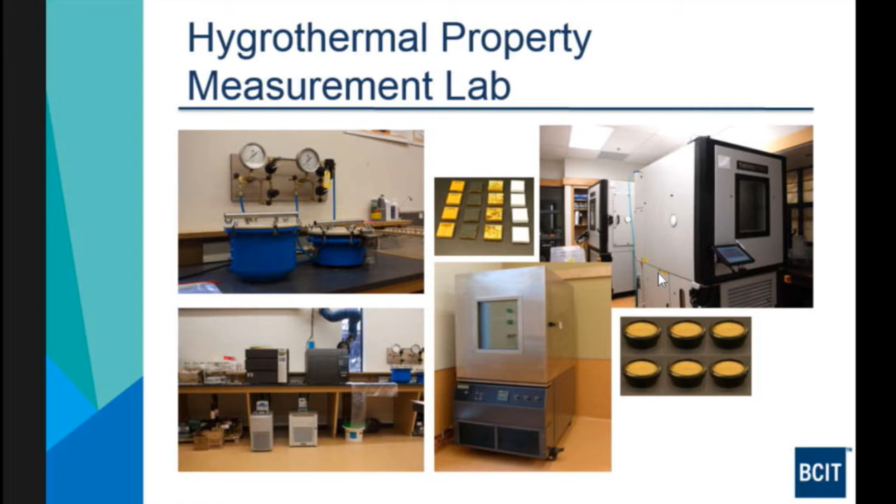Designed as a multi-purpose testing and training center, this facility has the research capacity to, for example, advance knowledge in quantifying wind-driven rain, evaluate and develop effective rain control strategies, evaluate the long-term hygrothermal performance of innovative envelope systems and building materials, and investigate the impacts of building envelopes on the indoor environment.

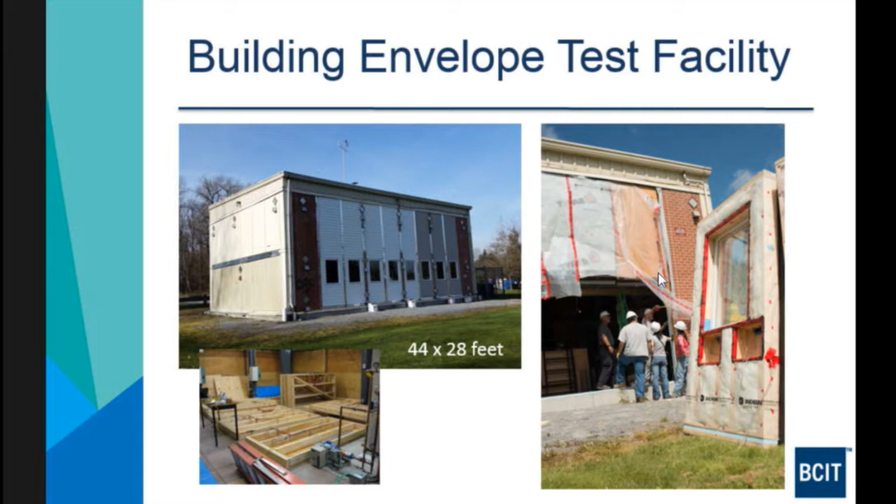This lab can evaluate various building design options in a holistic way, with the objective of choosing design parameters that lead to a reduction in energy consumption while maintaining indoor humidity at an acceptable level for occupants' comfort and health, and the durability of the building envelope components.

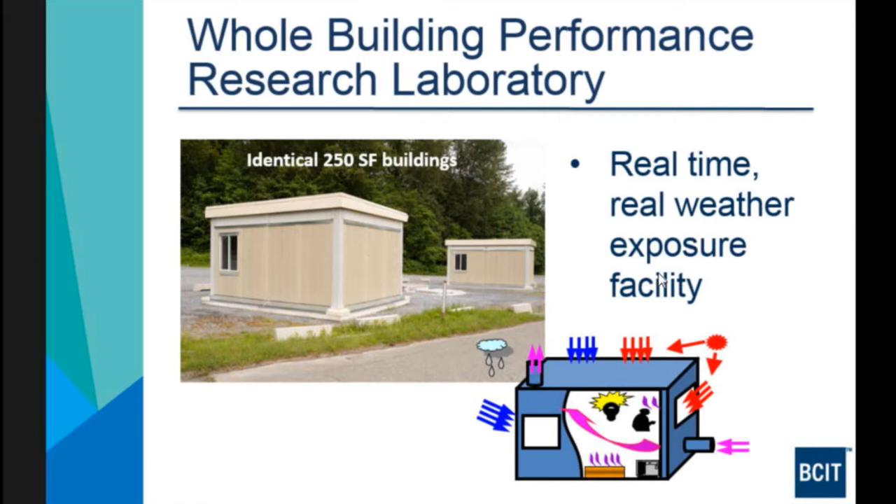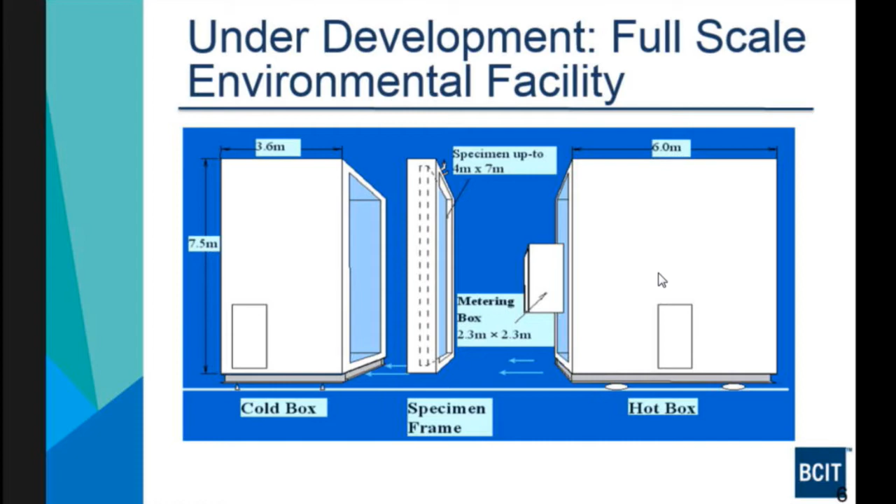Thanks, Bo. Good afternoon. The Center for Architectural Ecology was actually founded in 2002, and it serves the whole of BCIT quite broadly. The School of Construction and the Environment probably gets the best share of it, and within that, my attention to the graduate students within the building science program gets the best share of me. So I'll just go through a few slides.

This building is actually about 200 meters or so away from Alan's office and Fitzsim's office, but it is not in the large building where you typically go to meet with the faculty, just a little way to the east.

One is in the same area, the building envelope transmission loss setup, and I will speak to that a little later when we talk about research, a pretty exciting project coming out of there. And then we have a one-to-ten scaled anechoic chamber.

That anechoic chamber is like being in the middle of outer space, so no sound is reflected back. Boeing, for instance, has one so big they can put their super jets in it, and that's how we can understand the radiating intensity of sound. We do everything at one-tenth scale, just like an architectural model, and we bring the sound waves down as well.

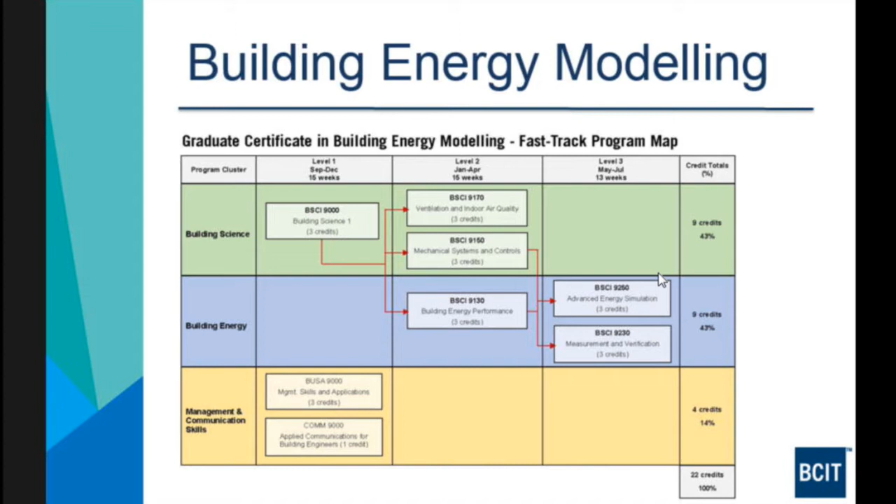I think I'm going to move on to the research. So I'll start talking about my research.

These are my interests: indoor environmental science, indoor environmental systems, and systems integration. These are the main areas.

So what is environmental science? It's what's going on in the spaces, about the physics, the air movement. It's not just physics, it's the central part, but it also has a psychology part—some people feel warmer than others, some feel colder, and there's psychology involved in that. Physiology too. So we collaborate—this is multidisciplinary, with people from different disciplines.

For example, thermal comfort, indoor air quality—that's building science, environmental science about air quality, where we need to understand contaminant emissions and transport in buildings, how contaminants move to maintain buildings healthy, where they are produced, from what activities.

That's indoor environment and systems, because we need to know how to deliver this indoor environmental quality. So when we talk about systems, I'm not just talking about mechanical, but the envelope, all the different systems. That's why I try to see this more as an integrated view.

Of indoor environmental quality. So here are some samples of what I'm working on right now with students: human and environment centered building engineering.

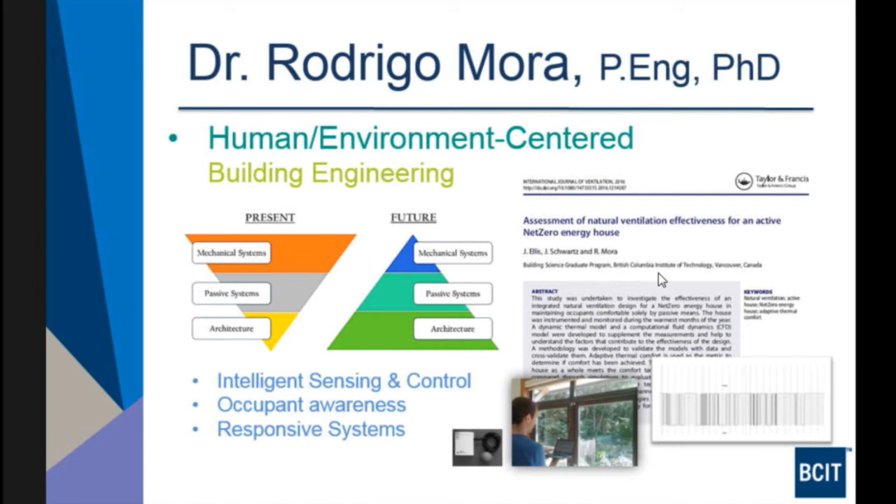Another project I'm involved in is building data analytics. That's a very interesting area, because you learn from the building. The building automation systems provide lots of data that can be supplemented—we can put our own sensors, and we are putting sensors in buildings, but we already have a lot of data coming from buildings, so we can use it.

Why is the overheating happening? We develop some analytics rules, basically, to find that. So that's an interesting project we're involved in.

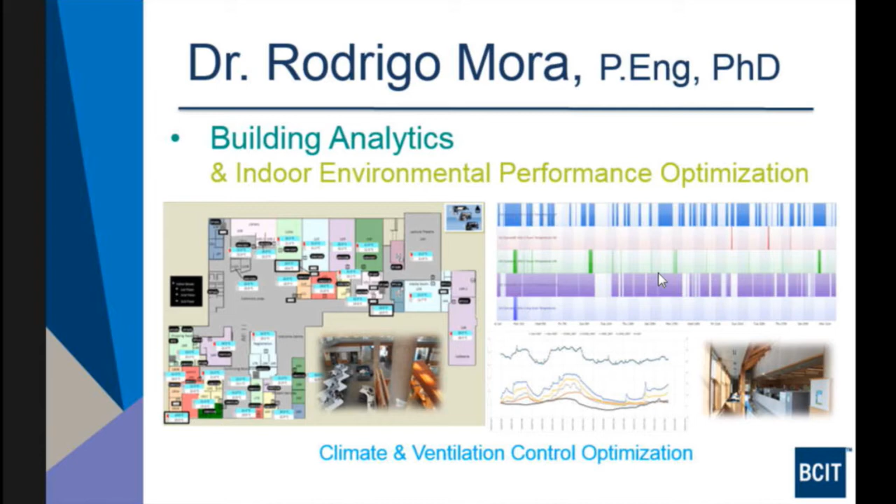The other one is paralleling housing, healthy housing—you can make the analogy to commercial buildings where we have remote sensing. We have a couple of houses, and we're trying to instrument more and more houses here in Vancouver. This is a very green home in Vancouver, developed by the newest code, with triple glazing and so on.

We instrumented the house—you see the data logger there—with some students, and we're monitoring the house. We can see the data from the cloud, and we're going to use analytics again to study the performance. We're also giving questionnaires, because this is about psychology too, to see how people operate and how they feel in the house.

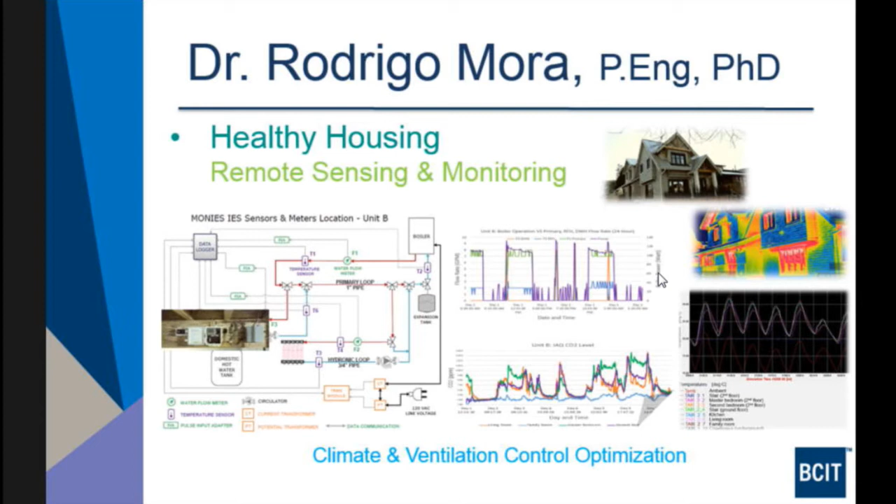My research interests, one is in innovative materials. Right now, as we know, the code has been changing every time.

There is a big push in having high efficient buildings. To achieve that, one of the things we have to do is on the envelope, meaning to have high performance envelope systems. To do that, one of the materials we need is insulation material, and with current materials we may not be able to achieve what we wanted. So one of my research areas is materials like aerogel insulation material, vacuum insulated panel, natural-based fiber reinforced insulation material, and also combination of different insulation materials to achieve high performance envelope systems.

The next one is building envelope design. First, I'll be looking at the material level using the facilities Bo was talking about earlier, looking at each material's property, both from the thermal and hygrothermal property perspective. Then moving to the building envelope, now knowing each material property, we can put it together and see how it performs as an assembly or as a whole system in the building.

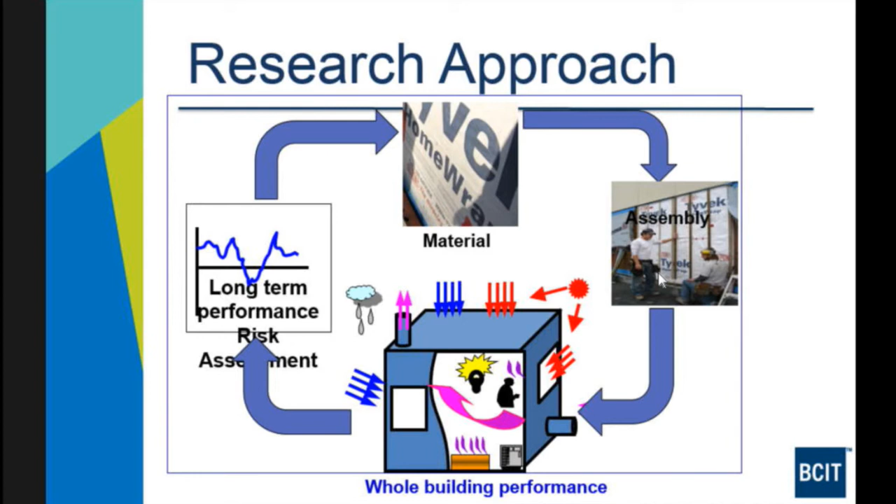I do lab and field experimental studies as well as computer models, using existing computer models and developing new ones. The inputs are material properties, which can be characterized from the facilities that Bo showed, and we have a weather station for climate data, which serves as input to the model. Then from the lab and field experimental study, the models will be validated.

And then the validated model is used for design of experiments. Once this cycle is completed, the model will be used to predict how it performs in other kinds of scenarios. So this is an integrated approach that I'm undertaking at this time, and a number of students are working in different areas of this map.

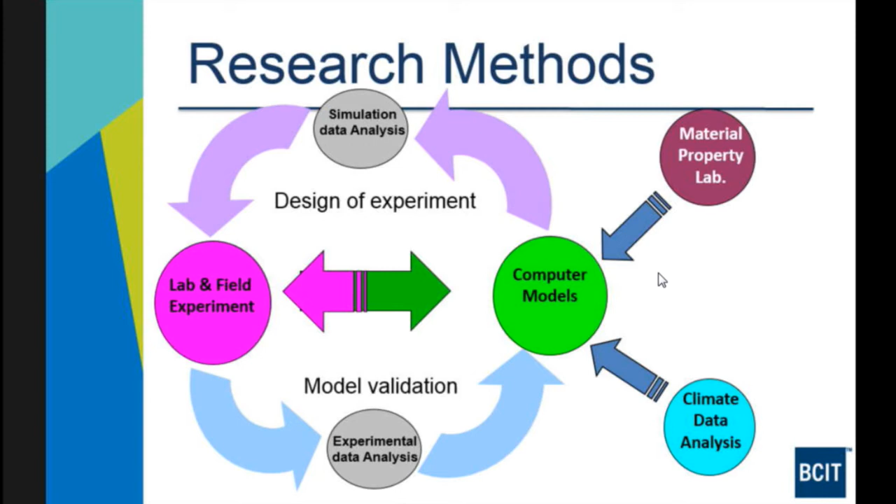Well, I like that last slide because I could adopt that one, and I think we all could. So I have a different approach of how I was going to explain my research work. I thought I would go over some of my students' projects, those that have graduated or those that are working, because as each one of us, we have fairly large fields of endeavors, so you might be sitting there wondering what piece might I get to do. So that's how I'm going to approach it. But I can summarize it.

First, it's in architectural acoustics. And when we talk about architectural acoustics, we're talking about the larger community, so outdoor sound propagation. One of the things that's very much happening here is an increase in densification of this city. And as you increase densification, you increase your ambient noise level, and we have to deal with it now. It's just starting to happen here on the West Coast. There are people in England, in some developing countries, that are well ahead of us in terms of densification and noise source.

The need for that research is tied to the issue of health, where noise can create stress, cardiovascular disease, cognitive delay, and a number of other health issues. Those would be epidemiologists that I collaborate with who work on that.

So architectural acoustics is what's happening in the exterior environment. The next part is we follow the path of where that noise goes, and for us in the building science area, it's going through the building envelope. There's a fair amount of research around sound transmission through the building envelope—we'll cover that in a bit—and then what happens inside the building. That ties into the whole concept of indoor environmental quality, where acoustics is very much part of that.

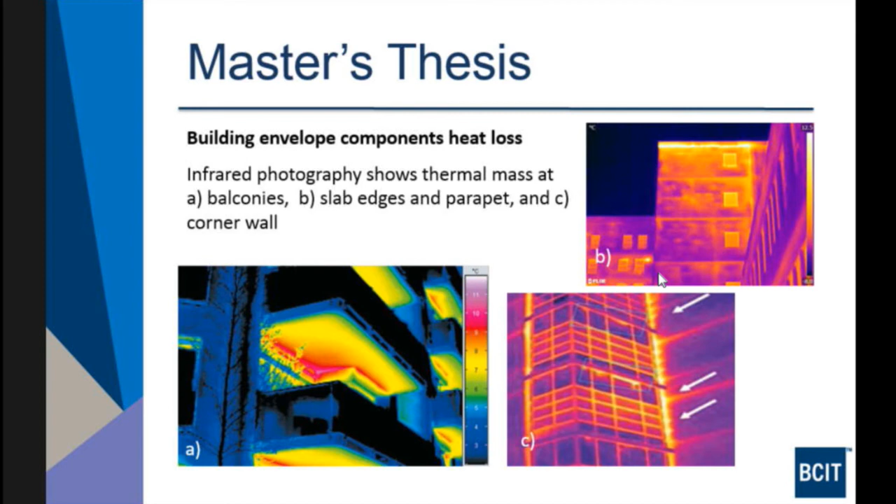Transmission heat loss through building envelope components constitutes a major portion of space thermal load. Additional heat loss in multidimensional assemblies of the building envelope, such as corner walls, balconies, slab edges, and parapets, has negative impacts on occupants' thermal comfort, moisture condensation, and energy consumption of buildings and their occupants.

Therefore, it's essential to design building envelope details in a way that reduces these negative impacts on buildings and their occupants. My research is about minimizing heat loss in concrete buildings by developing high thermal performance building envelope systems that exceed construction requirements of local codes and energy codes, and also standards such as ASHRAE and LEED.

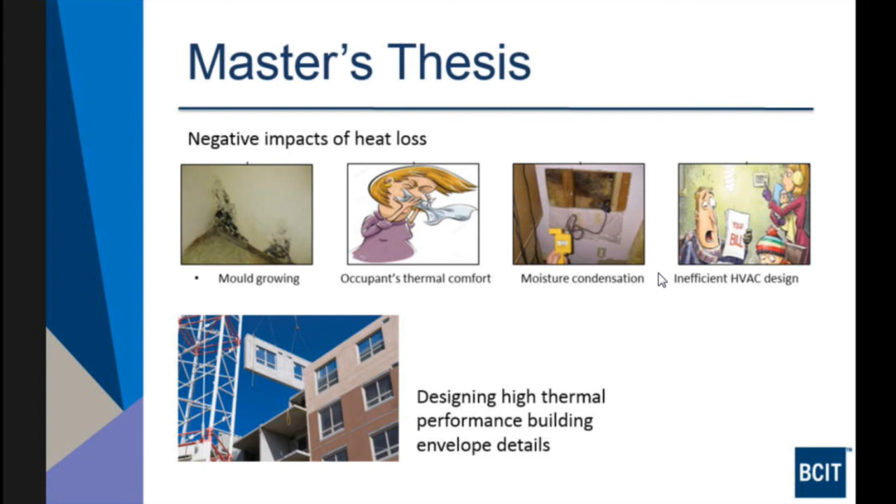Activities in the building science program are not limited to research and studies. We also have a community for students to get involved in. The Building Science Student Club, or BSSC, is an organization started and run by students for students. Our goal is to help create a community to support new students, prospective students, and current students as well.

Events of the club include academic seminars, site visits, and social events. All in all, I just want to say I'm happy that I found this program. There are lots of demands out there for students who graduate from this program. I encourage you to go for this program, and you'll have my support for sure.